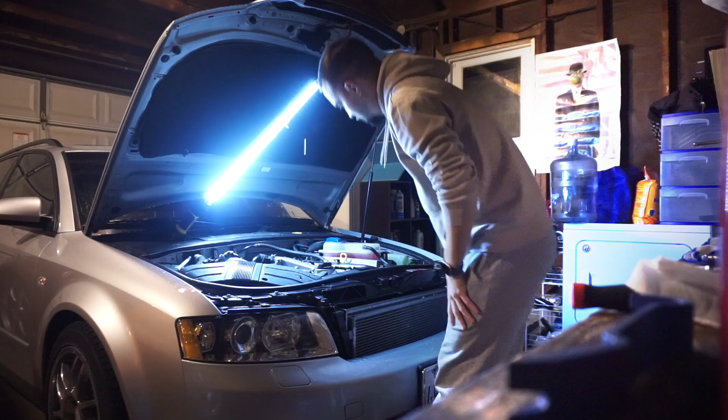Plenty of guys out there getting a new set of wheels every other week. You know, people that are putting turbo kits on everything every week, the people that are doing a whole bunch of stuff. Enough of that on the internet, I think. What I decided I'm gonna do is some basic ass maintenance. And today we're working on the wagon.

Not a lot of you got excited about it because not a lot of you watched anything about it. But this is not my first 1.8. You know, it's supposed to be a pretty good motor. I've had some issues with it, but how about I just walk you through what I've done so far and tell you what I'm doing today.

This, I'm trying to shine a light into it to show it to you. As you can see, there is a bit of a sediment right there in the coolant, which is scary. Don't get me wrong, it is super scary, and without knowing much, what you do is you assume that the head gasket's gone.

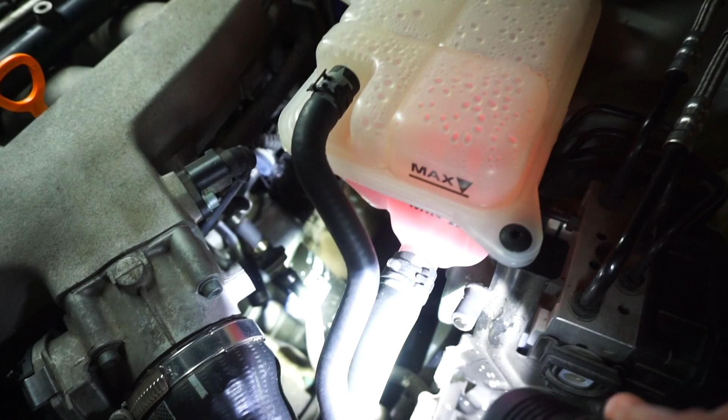But a few painful research nights later, I find that apparently it's fairly common for these things to blow an oil cooler, which is actually an extremely easy thing to replace. It's this silver sandwich plate that kind of connects the oil filter to the block, I should say. And when it fails, it allows for the oil to get into your coolant.

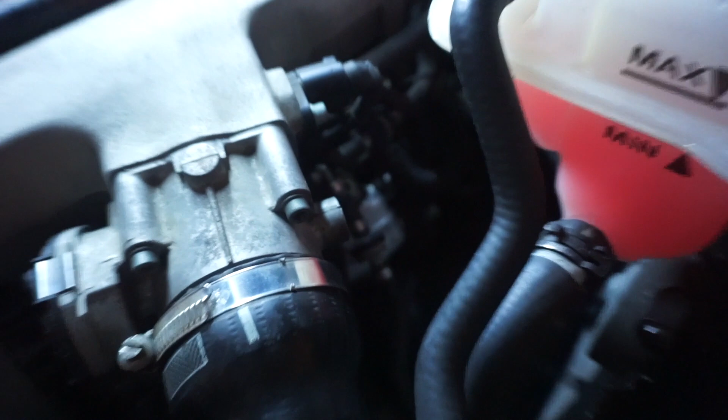So I've replaced that, and since then I haven't really had any new sediment, so I think I gotta flush the coolant one more time. But what this entailed is really there's just a 27mm bolt once you remove the oil filter. Anyway, there's a 27mm bolt on that side, and I kind of had to actually buy one because it's not a normal size that you have, and the nut is extremely shallow. So I did that, but I thought, you know what, might as well refresh the entire cooling system.

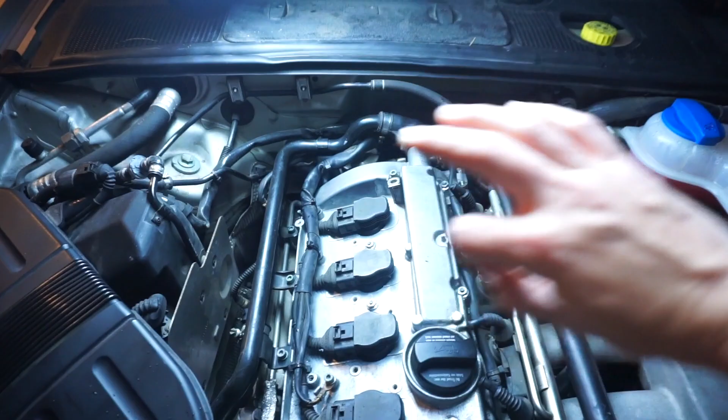So in the short amount of time that I own this, so far, this new expansion tank, of course, just to make it look a little nicer. The thermostat housing, thermostat itself, J-plug, which is a little plastic plug that looks like a letter J, but it's literally there for nothing other than when these motors are installed transversely as opposed to this way, it's just a port that's never used. So mine actually ended up looking like this. This is actually it.

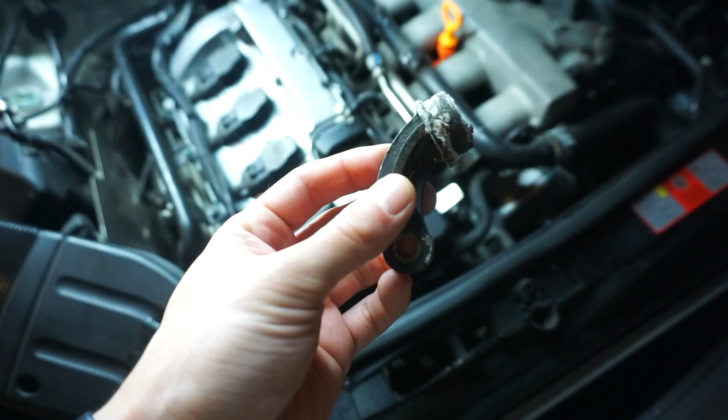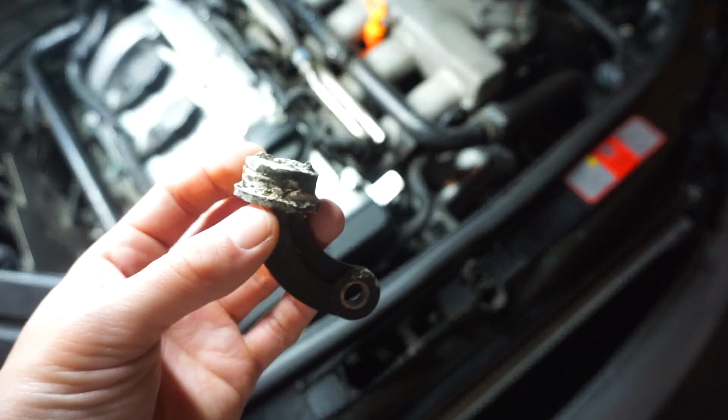So it's super gross, and there is an extra portion of it, about a 1/4 inch like this, that's missing because it broke off inside of the block. To pull that out, that was a pain. Being a terrible YouTuber, obviously I didn't film it, but I think there's a second portion of it here somewhere. Either way, this also broke. Very common when I was taking everything apart. This is just a dipstick tube that was like $10 on Amazon. Replaced that.

And a new radiator. As I was pulling the alternator, I noticed these actually have a little clutch on the alternator pulley, I guess. So something that lets it disconnect when the battery's not charging, I suppose. So replaced that, and other than that, it's been pretty good.

You know, I think my front axles are starting to click, but again, buying a car with 100,000 miles, especially one with this logo, right? You may expect to put some money in it. But so far, it worked awesome for beach trips, for things like that.

Randomly, sometimes what happens is I'm trying to get on the highway, let's say, give it a little boost in third gear, and it breaks up a bit. And the most common problem typically is these guys, ignition coils. Super easy. As I told you, doing basic ass maintenance today. We're going to do that. Obviously I already changed the oil and all that random small stuff, but yeah, let's just get right to it.

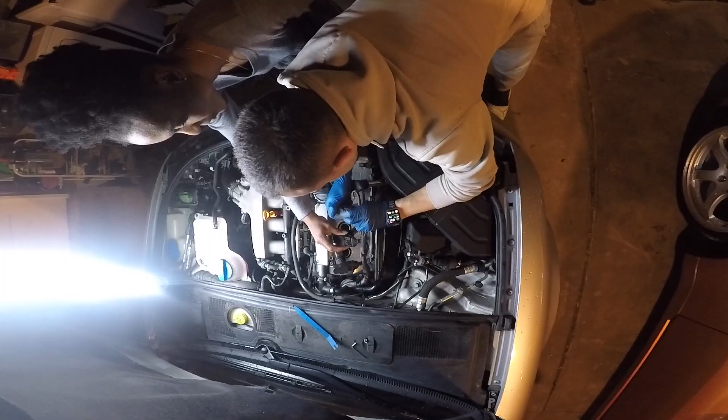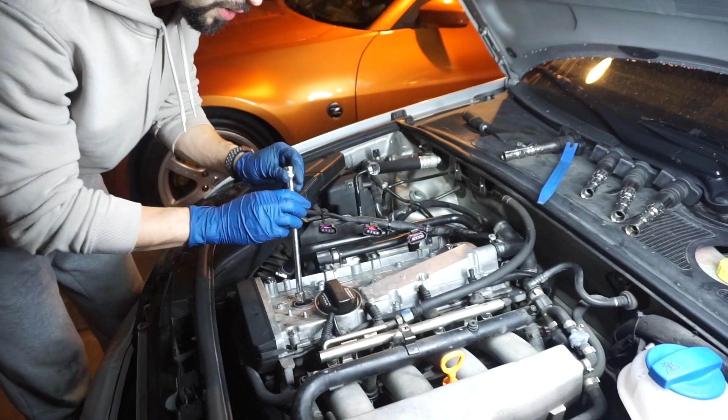So far I disconnected the 4 coils. Only broke all of them. Not the coils, but these fucking clips. Pisses me off, man. Grinds my gears. Expletive. Brittle ass shit. It smells like gas.

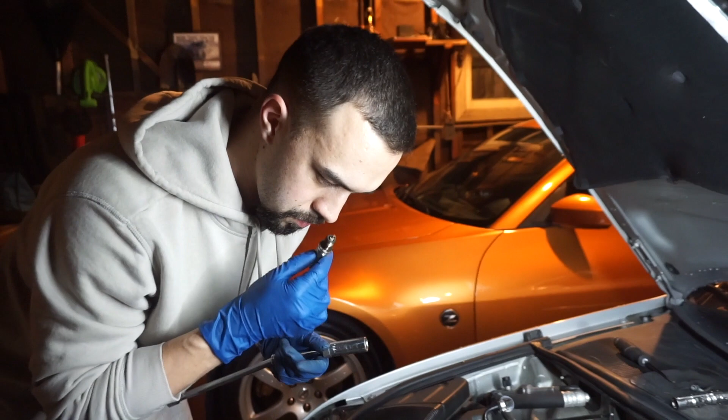Should I describe what I'm doing? I'm taking out the spark plugs, if you can tell. For some reason, I guess because my extension is too long, this was really difficult.

Wow, you trying to be a gimbal? I am a gimbal. Human gimbal? I'm a gimbal. Once you see how shaky that shit can be, you will know what a gimbal actually does for $2,000.

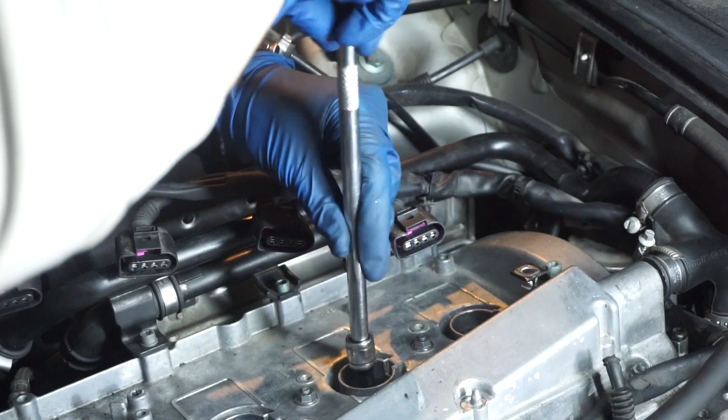This one has quite a bit of oil in it. That's okay. Famous last words. I know, right? Sounds like I am zooming. Wow. This is what you call detail and precision. Framing the shot out. Wow, this has even more oil in it. I'm gonna taste it too. No.

That's surprisingly tight. That's what he said. Wow.

Wow. What are you wowing at? Annoying the viewers, losing me subscribers. I'm sorry. Stay. Please stay. Or go. It's up to you, you know. It is. It's a free country. Make choices. Live with them. Dun, dun, dun, dun. The more you know.

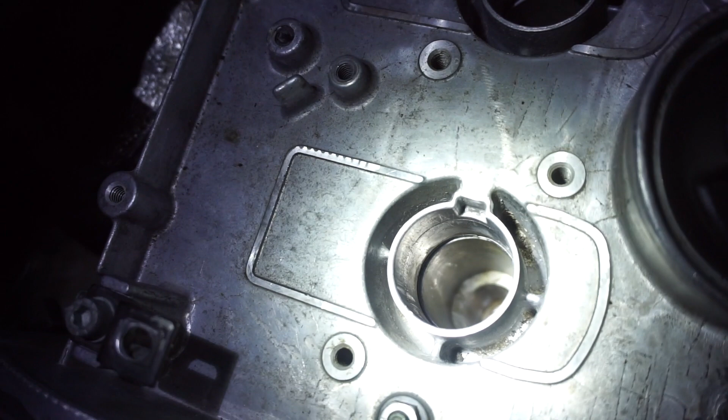There's a ton of oil in these cylinders. I think that's a good thing, right? Isn't that how they work, with the oil? Man, Alan, remember we put that fuel cleaner in there? Yep. The valves are so clean, it's amazing. I know. But funny enough, I think my turbo seals are going bad, and it's putting a lot of oil into the combustion chamber. But they were super black, and now they're a little bit better. Can you see that? A little better. So, AutoZone, Lucas fuel valve, something cleaner.

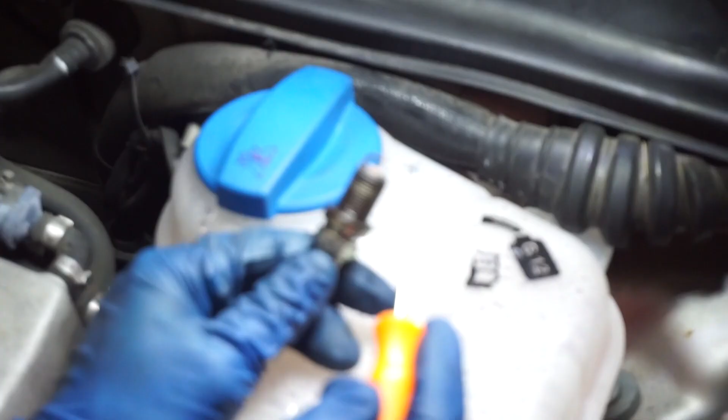Next step is actually important, which most basic ass maintenance videos won't show you. Well, maybe they won't, maybe they will. So right here, a spark plug fires in this little gap right here. Can you see this gap? Some of these plugs usually come pre-gapped, meaning that the gap is correct. But you want to make sure, it also depends on the boost you're running and all that stuff, but you already know that if you know gapping plugs. Either way, you want to at least make sure it's within factory spec, this gap right here.

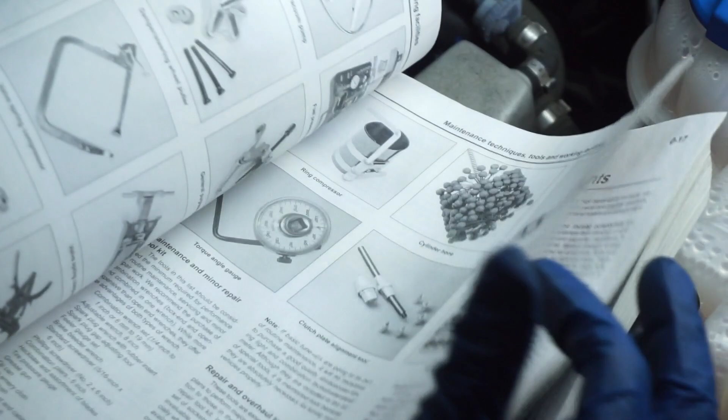And the more boost you run, I think typically the less of a gap you give it. It also depends on the fuel, all kinds of other shit. But on the new plugs, you want to make sure that they're not all wide open or way too tight. You want to make sure it's within spec. So, where do you find the spec? The most useless fucking book in the world. But it does have some specifications. So, spark plug, type and gap. Pages 1 and 2.

Are you serious? Oh, no. This is section 1, page 2. Reading comprehension. Look. Someone missed that class on how to read a book. Shut up.

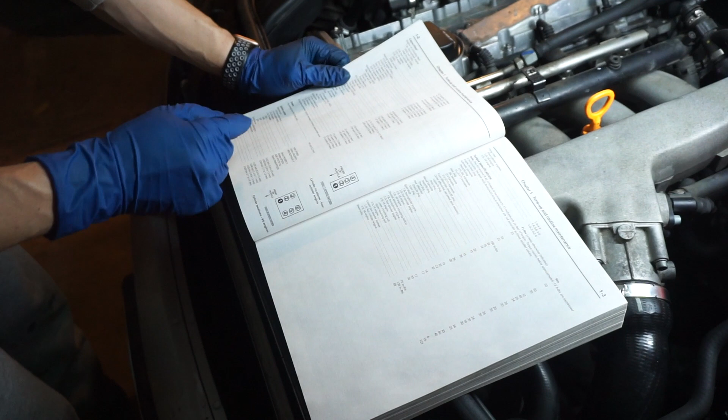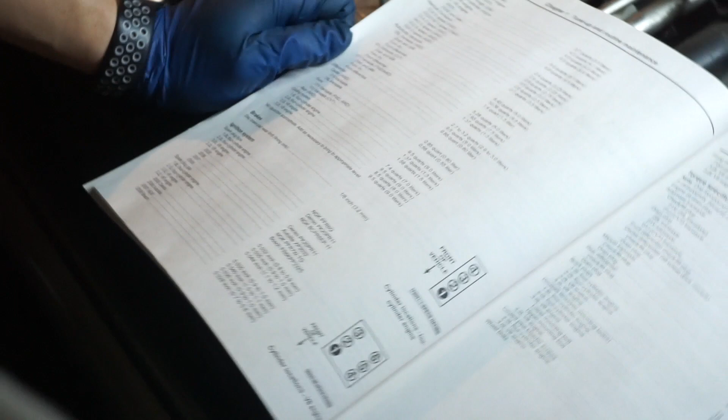NGK PFR6Q is the type of the plug. Spark plug gap: 32 thousandths of an inch, which is just the stupid American way of saying 0.8 to 0.9 of a millimeter. So much simpler, right? 32 thousandths. We only have inches. We Americans.

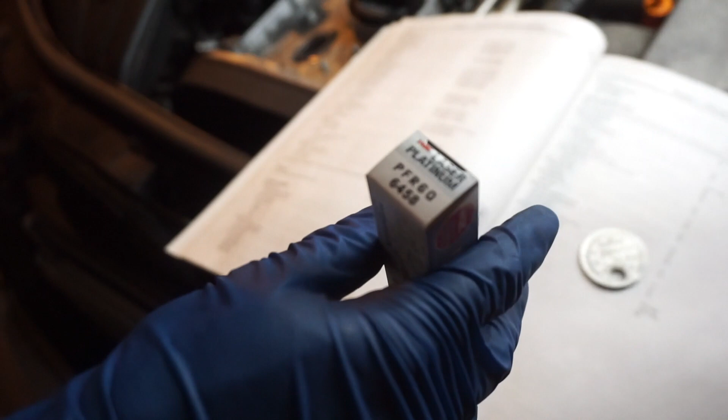So this is what a high quality 99-cent spark plug gapper looks like. Looks like a coin. And look, the right spark plugs from a nameless store because they don't sponsor me. When a store sponsors me, they will know. The YouTubers will know. Either way, here's how you do it.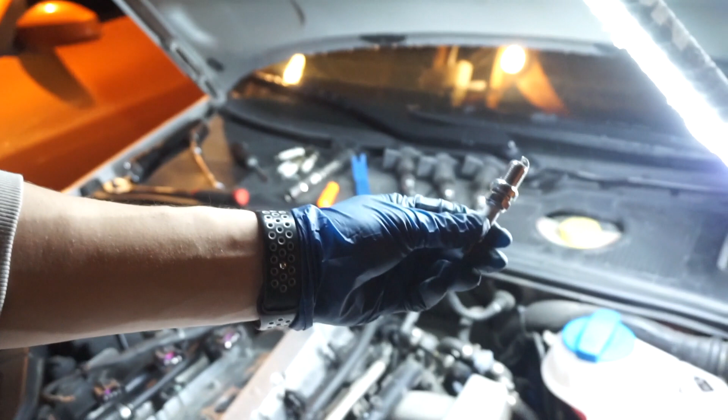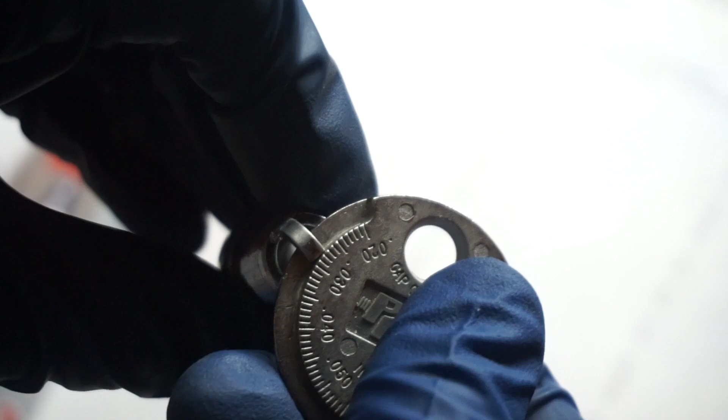You take your little fresh spark plug. Oops. Make a mess. All right, so this actually looks to be, I don't know, can you see? Can you see? Mm-hmm. There you go. So it looks like this is pre-gapped, but here's how you do it. You start at the beginning of it essentially, like this, and you slide the coin over, and when it stops, you know what size it is. So in our case, it's actually a little too tight.

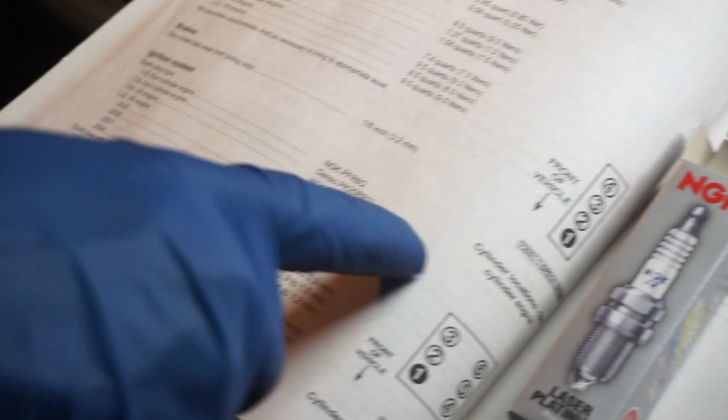Or no, yes it is, because the book calls for 32 thousandths, and we are at, oops, actually we might be right there. So we're now at about 32 right there, so you can kind of slide it and that opens it up a bit.

Yeah, don't know what store this is, they don't sponsor me.

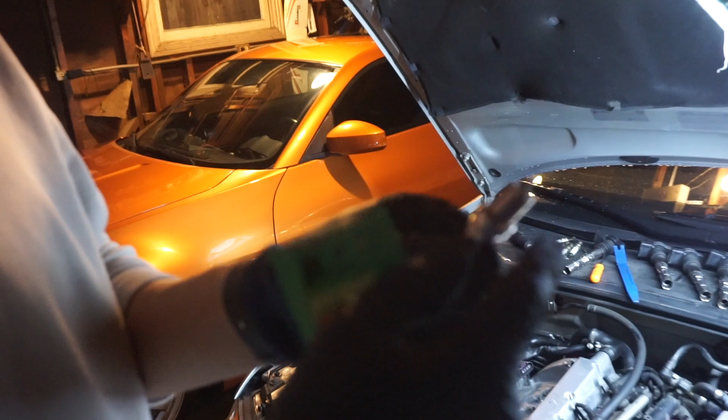Dielectric spark plug boot protector. Avoid stuck boots. Well, actually some people like to put anti-seize on this. So in case maybe any moisture gets onto it, it doesn't rust onto the block. Right? Because there's heat and all kinds of stuff happening. If you put anti-seize on here, it won't rust onto the block and let it seize. It'll be easier to take out. Usually just a dab of that. I don't know if that's right or not, some people say you shouldn't do that.

Like these spark plugs definitely did not have any. They were kind of a pain to take out. They were fine. You know what, we're going in bone dry. Right? Bone dry. So again, this tool is really useful for something like this. It has a little magnet and it also protects your ceramic thingy right here. So you pop the thing into the proper spark plug socket so it won't fall out. Pop that thing into your cylinder and start it off by hand.

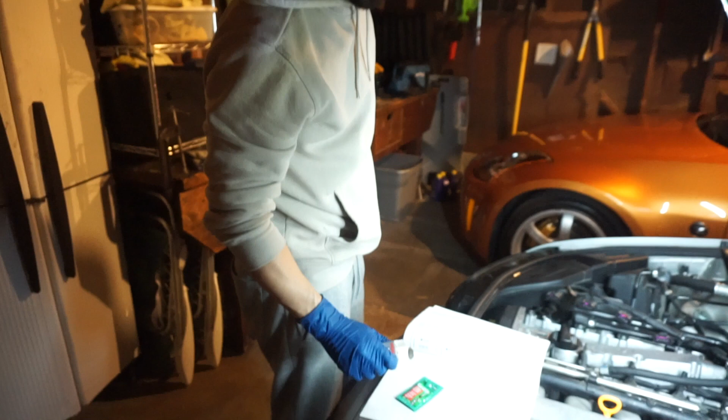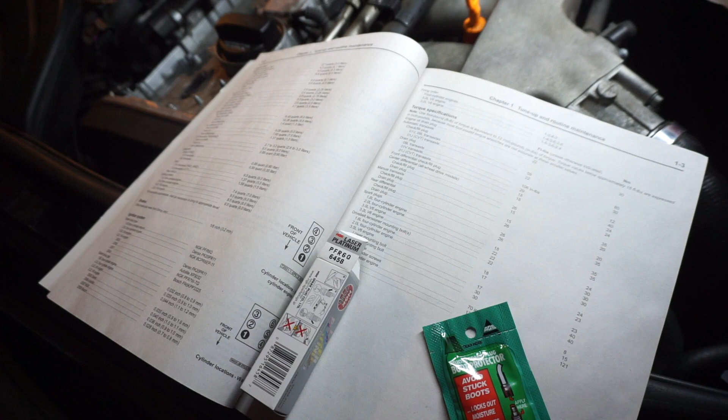Spark plug. It actually has torque figures for spark plugs, which is cool. Why is it cool? Well, because most manuals say like something tight and then a quarter turn or full turn or something. This has a torque figure, but it's really low. It's 18 foot-pounds, which is like my wrench. That wouldn't really make any difference if I go that low. So, well, actually, I'm going to use the old built-in torque wrench. You know what I'm saying?

You know what I'm saying? They do. They know what you're saying.

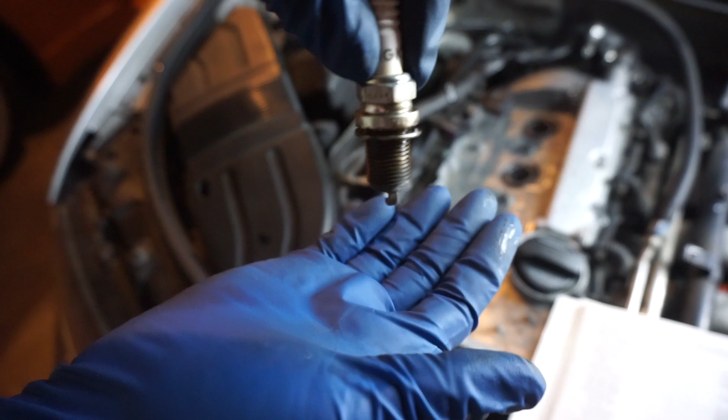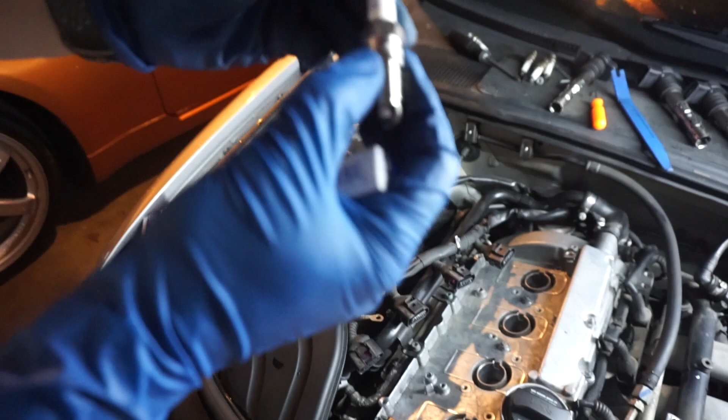Okay, good. So we're gonna tighten that a bit. There's different types of spark plugs, right? This one has a crush washer, right? So this washer right here literally needs to be crushed in order for the spark plugs to seal in the cylinder. There's also this type right here that they don't have a crush washer, so these will typically seal in without you doing it, but they kind of have this shape that helps it seal, right? Serves similar purpose, I guess.

Either way, spark plugs are in. I think they're tight enough. They feel like exactly about 18 and a half foot-pounds to me. So it's all good. Now these are prettier because they're red. I think it's like an upgraded part number. Probably better because it's red. So this is literally as easy as the reverse of the other situation. Pop it in with now your newly broken clips.

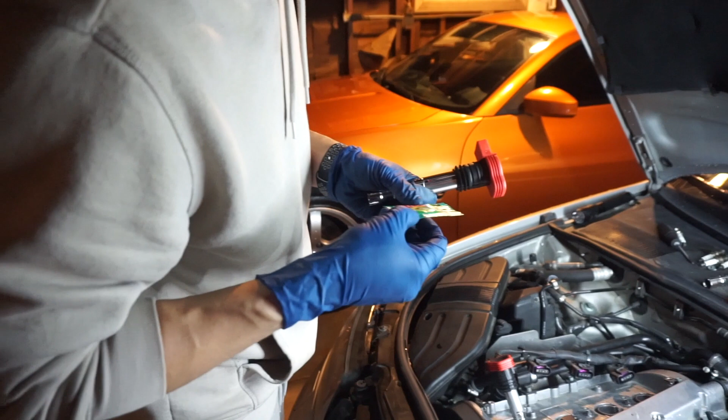What do you want me to put? You want me to apply it to the spark plug. So this is the time where this might come in useful. Tear here. Oh, that's a cool baggie. You tear it and there's a little corner immediately for you. That's kind of neat. Well, because you know what you're doing, right? Can you film? Look, take it on the little thingy like this, and then go right in there. Right in there. Okay.

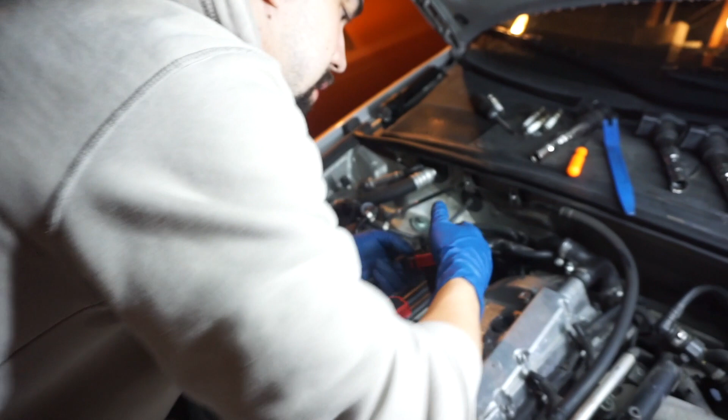They kind of click a little bit once they are finally in there. So what I'm trying to hit is that little rubber ring. Okay. Smells like quality. Smells like a province in China that has made them. Okay. Well, I should say they would click if I didn't break all the clips, right? Because the clips is what makes the clicking sound. This is number 4.

Okay, there's a couple thingies that hold the wire in. There's a single ground for all 4 of the pairs. Oh, I wasn't filming this for a while. Oh, I was. Never mind. Alright, so you tighten that. That sucks that I did that. Wish there's a way to replace that. Anyway, you take all this stuff, you save what you need, you throw away what you don't, and then you open up the garage door so you don't suffocate, and hopefully see if she runs.

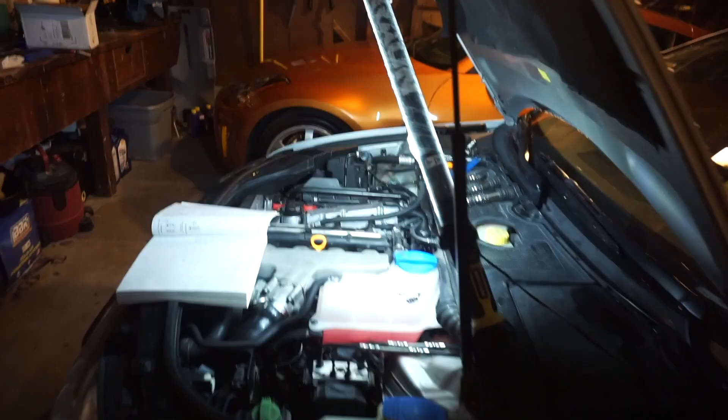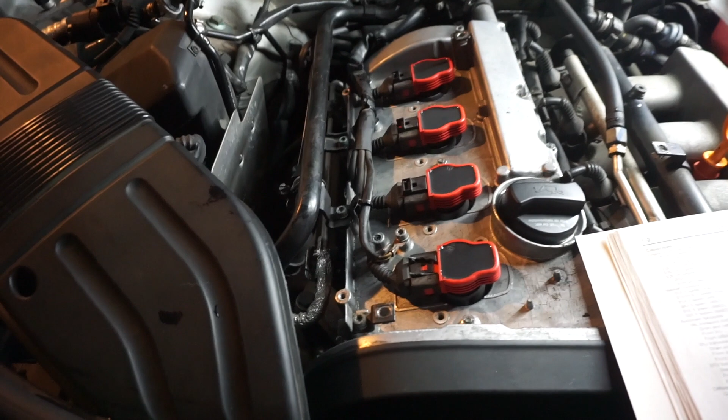Basic ass maintenance.